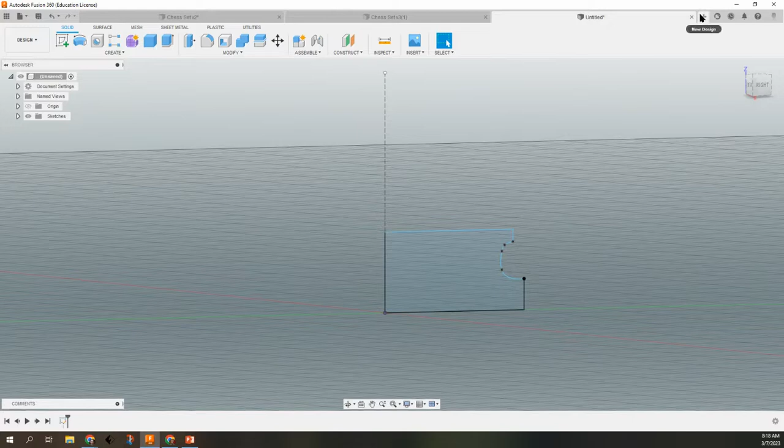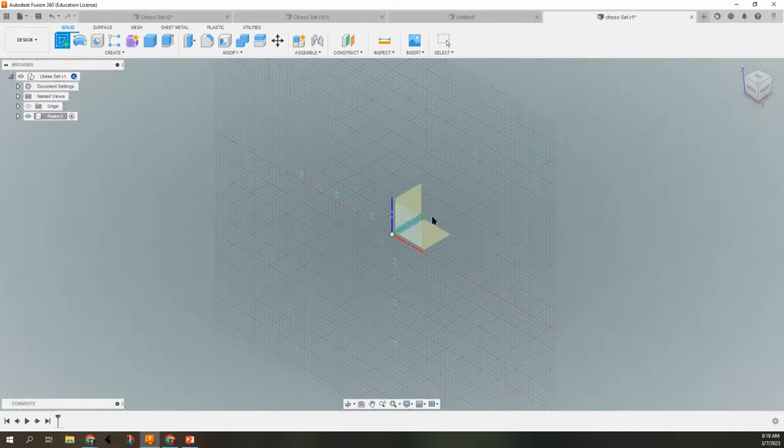So here we are. And let's just go ahead and start and save our thing as chess set. Okay, and let's create a new component. And let's call this one pawn. Very good. And in pawn, we're going to go ahead and create a sketch. And we're going to choose one of these side ones. Very good. And if we want to we can either imagine a pawn, or we could even bring a picture of a pawn in if we wanted to.

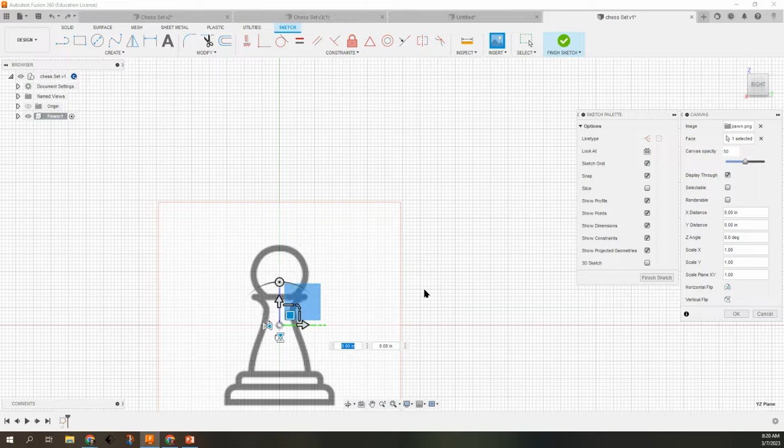And here's a picture of a pawn. We're going to go ahead and place it right here. It's nice and dead center right now. I'm going to go ahead and leave it at dead center so we can use the origin. Its size and scale overall from here to here is an inch. So whatever we end up making is actually going to end up being a little bit bigger than that. And that's okay. We can always scale it up and down. Let's hit OK.

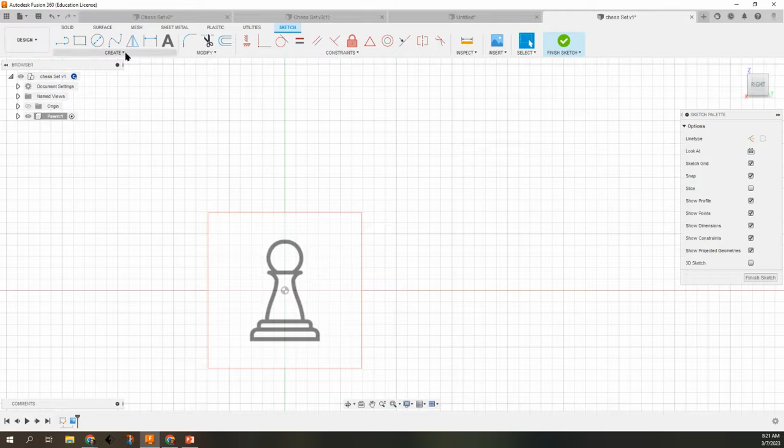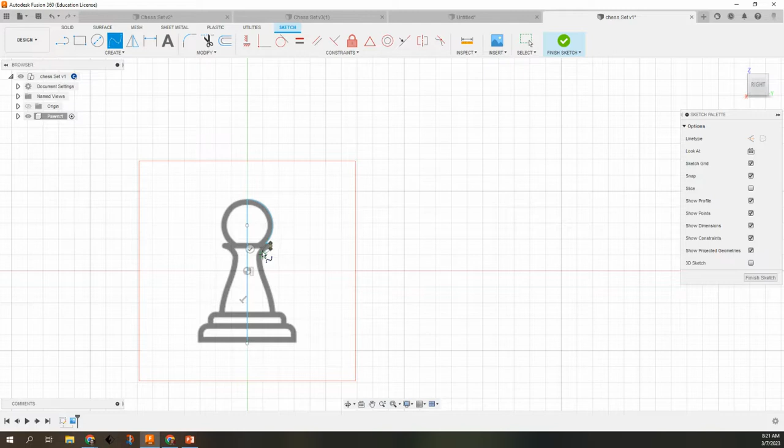And from here, let's go ahead and first create our line of symmetry. So right down the middle of this. Okay. And everything else, we're just going to create the outer profile that's going to be revolved. All right, so first one here, let's do a 3-point arc. Boing. And it looks like we can go for a spline over there. Spline, maybe to get around this corner. Remember, you can zoom in to get finer details on your curvatures.

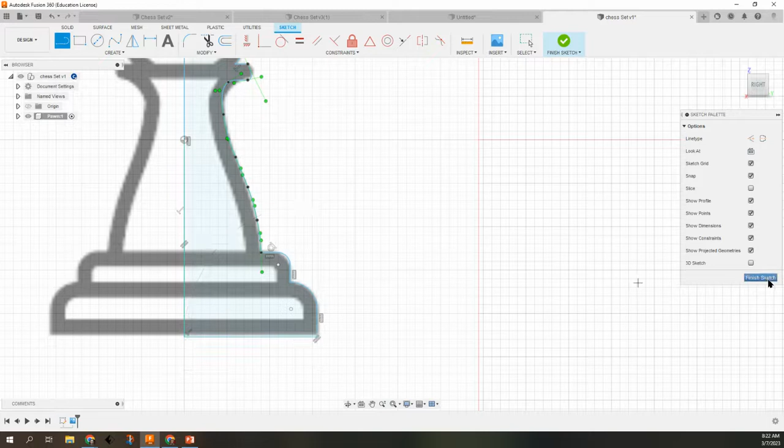And you don't have to use these 3-point arcs. I just like to use them because they have a nice tendency to be a little bit smoother and more controllable than the spline. And then let's just close this. Oops. Bring this down so that it is in line with this. Good. And then we can close it off. Okay, finish sketch. And now we can revolve this around an axis.

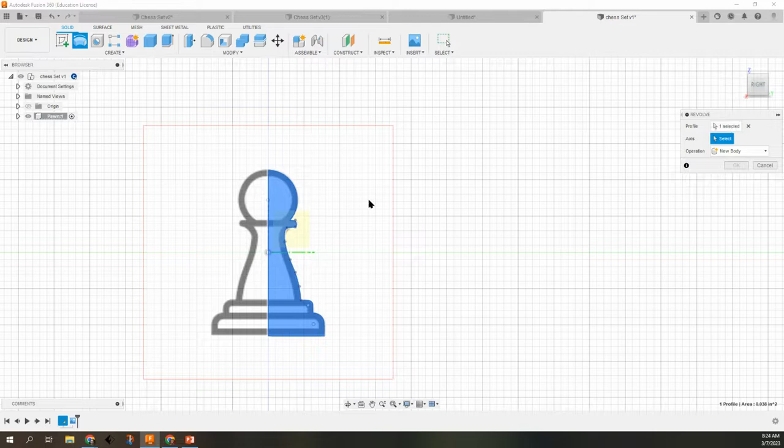And so now we go up here to revolve. If you don't see it, you can go under create and revolve. And we can revolve this profile around an axis. And it creates a new body. And we can go into our canvas. Turn the canvas off. And there you go. There's a pawn. Pretty cool.

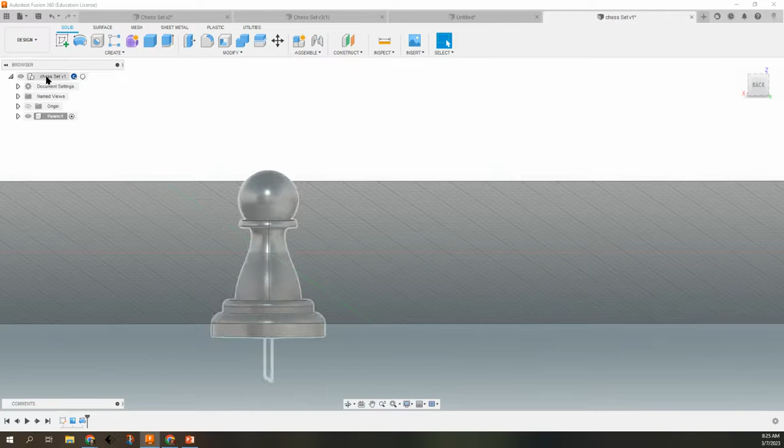So you can follow the same process for each of your other pieces. I would recommend that you go into here, do a new component, choose the next piece. Probably your rook would be another good one to work on. And you can just hide the pawn, work on the rook, and go from there. Now, keep in mind, this is just a standard chess set, right?

You can make whatever you want. Once you get a base in place, you could put a dragon head on something. You could put a Yoda's head or Darth Vader. You can create your own Star Wars set, fish, Mary Poppins. I don't care, right? So just because you see a standard chess set and it probably is easier to make doesn't mean you have to just do a standard chess set. Have fun with it, kids.